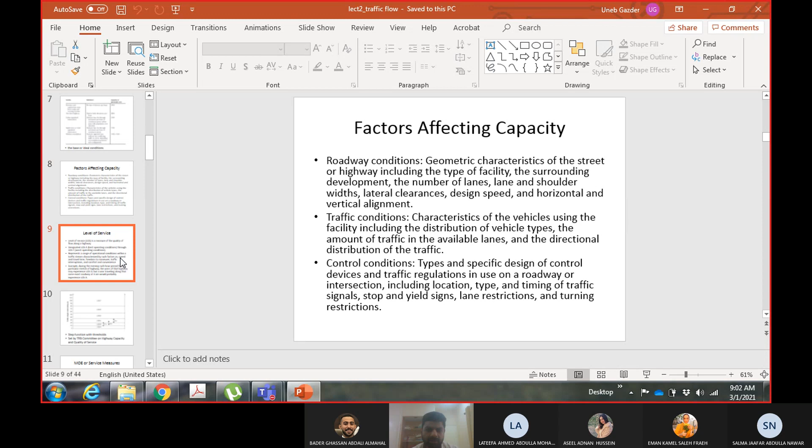Today we'll start the discussion with level of service, which is in short called LOS. Level of service is like a grading system for the highway. Like we have a grading system for you, A, B, C, D, E, and F, the same goes for highways. They have a grading system from A to F, and A means the best and F means the worst. LOS is a measure of quality of flow along the highway. A means it's moving very well and F means not moving at all.

Level of service is attached to the operational conditions of the traffic stream, and these operational conditions include speed and travel time, freedom to maneuver, traffic interruptions, and comfort and convenience of the driver. Speed increases, travel time decreases, so they are interrelated. With more speed you will have a better flow of traffic.

Freedom to maneuver is how easily you can move between lanes and change your direction and path. As freedom increases, level of service goes towards A. Traffic interruptions cause more disturbance and turbulence within traffic, so when they increase, level of service goes towards F. And comfort and convenience: if you are feeling more comfortable driving, and it is convenient to drive as per your own will and desire, level of service is close to A.

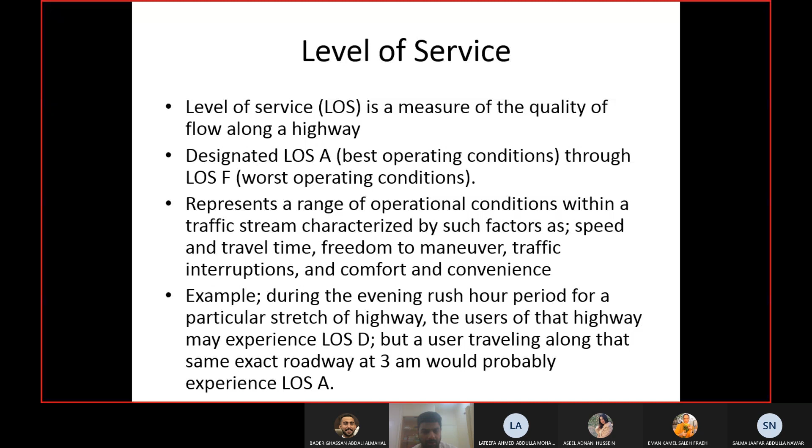But anyway, if he is on the road at 3 a.m., he would probably experience level of service A, because he would not find anybody else there. His speed will be higher, he will have full freedom to maneuver, traffic interruptions may not have much effect, and he will feel comfortable and convenient while driving. So the same highway may attain different levels of service at different times.

Now level of service is called a step function, like any grading system; that's why we call it level. What do we mean by step function? Let us take the example of your grades. If your marks are between 90 and 100, your grade will be what? A. Okay.

So from 90 to 100 is the full step for A, and within this step your grade doesn't change. You get 90, 91, 92, 93 or 100, it doesn't matter, your grade will remain A. And how much is the range for B? Sorry, how much is the range for A minus?

87 to 89. 87 to 89, approximately correct. Okay, we count the fraction as well, but no problem. So again, 87 to 89, your grade will remain A minus. It doesn't change.

Salma, is it right? So she is worried. She's worrying a lot about her grade. She remembers everything, which is good.

Okay, so you can see an example here, how the step function may cause grades to change with the same units of change in the traffic parameter. For example, if you take signals, level of service is related to delay. So when delay increases, the level of service changes. But it changes with the step function.

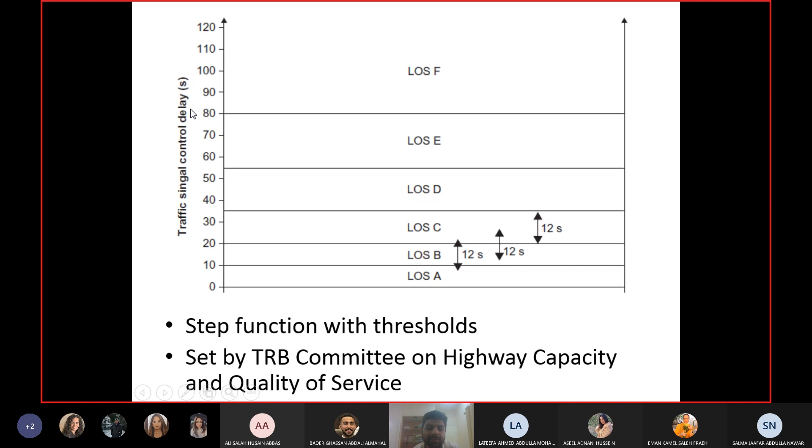Okay, MOE or service measure or performance measure is the parameter that defines the operation of a traffic system. Okay, that defines the level of service of the system. So like I showed you in the previous example, the MOE for a traffic signal is delay. The parameter which is related to level of service is delay, which is related to operations of the traffic stream. Okay, so there are different names given to it: MOE, service measure, and performance measure.

MOE stands for what? I used it yesterday as well. MOE stands for what? Anyone? MOE. Measures of effectiveness. Yeah, measures of effectiveness.

Thank God you didn't say Ministry of Education.

Okay, so measures of effectiveness, they include delay. Obviously, for different facilities, like I said, it will be a different measure. Traffic operations for different facilities are measured using different parameters. So delay for signals, for example, travel time, speed for some other facilities, number of stops again used for signals or intersections, queue length used for intersections, density used for freeways and multilane highways. So it depends upon what type of facility you are doing the analysis for. On the basis of that, you will select your measure of effectiveness or performance measure or service measure.

For example, the delay for vehicles at a signalized intersection is important, right? Because signals cause delay, so it is important and it is interesting to study how changes in signal timing and the volume are affecting the delay. But at an intersection, there are other parameters as well which are important for the user. For example, the number of stops, in how many stops the vehicle can pass through the intersection. Or the queue length, how long the queue is accumulated at the intersection because of the signal. So these parameters are also important from the perspective of the road user or the person who is designing the road.

For example, queue length. On the basis of queue length, you provide a storage space, like in the turning lane, or you may also have to check if the queue is spilling back into the other lanes. Let me show it here. So you have an intersection here, and this is the median, and with the median you have a turning lane. So this lane is for turning. The queue length will define how much this space should be. This is what they refer to as the storage space or the turn pocket, the space which you are giving for the lane of the turning vehicles.

Now, if this space is not enough for the queue accumulated for the turning vehicles, then that queue will go where? That queue will spill into the other lane. If vehicles cannot find the space to move into this lane, they will be continuing in this lane. So this is blocking now the through movement, the lane for the straight vehicles. And you can see it happening if you go towards Riffa from the clock tower and take the left turn. On that highway in the rush hours, you will see this thing happening. It's very common there.

So the point here is, if you are just focusing on one particular performance measure and you ignore the other ones, then maybe you are ignoring some aspect which is important for the road user, or for the design of the road. So this is why we need to have different measures of effectiveness for a facility, so that it can show us different aspects of the operation of the road. Delay is very important for everybody, but delay is not the only important thing here for signals.

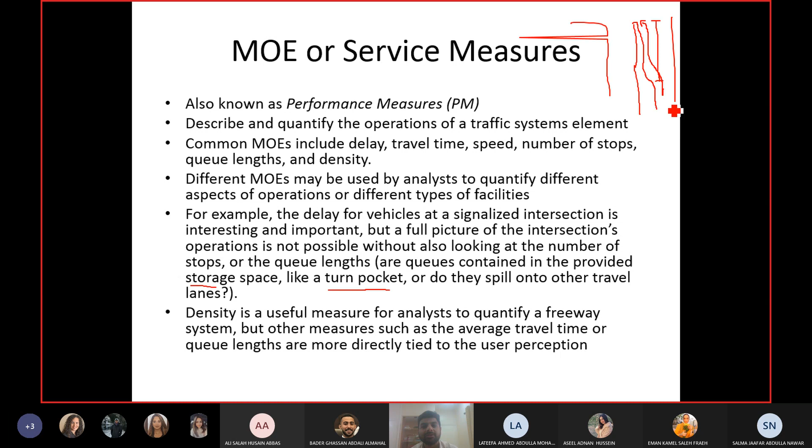Similarly, the queue length, especially at the time of congestion, how long the queues are at that time. Again, this is important for the road user. You see a long queue and you start to feel that you will die on this highway, right? So you have to keep these aspects in mind, and you have to make sure that they are acceptable for the road user as well. So density is important. It is directly related to level of service, but it is not the only thing. You have to consider other things which are important for the road user.

Level of service score means it's a sort of an interview, sort of a perception rating. So you ask the bicycle riders who are already using that facility to give you the score. How do you mark this facility? A, B, C, D, or E, and so on. So level of service score means you ask the user and he will directly give you the rating as A, B, C, D, E, or F.

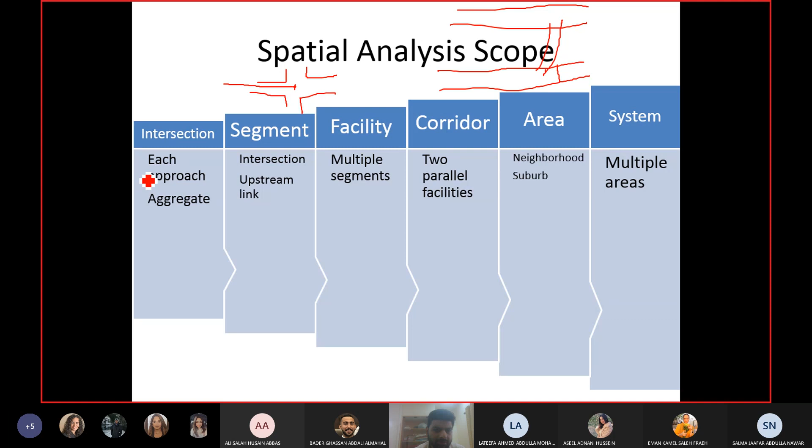So you have to select from these extents which is your purpose. You want to do the analysis for a system or an area or corridor or facility or segment or intersection. For example, for your term project, you are doing it for an intersection. So this is a graphical representation of the same thing. So this is the intersection.

Oh, sorry, this is the ramp terminal. This is a segment, so it will start from here and it will contain this link as well. We will discuss basic freeway and weaving later on. But let us talk about this. This is an intersection, again a stop-controlled intersection. This is a segment, so the segment includes this roundabout and this link. And if you consider all segments combined, it will be considered as a facility.

Then you can see the corridor, area, and system. This whole rectangle is a system because it includes different areas. And this is a corridor. In this corridor you may have multiple highways which are going towards the same destination. And on each side you have like 4 or 5 areas here. So each area has a set of facilities.

Here they are also saying that each intersection is a point. Okay, this is what I missed here earlier. So each intersection is considered as a point, or each ramp terminal, wherever the ramp is terminating, is also considered as a point. So these points may look in the middle of the highway, but they are basically the terminating points of the ramps.

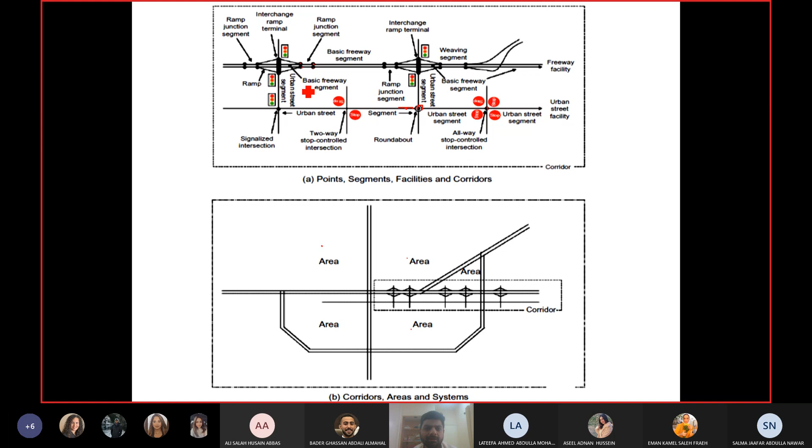Then you also have to set the time period for which you are doing the analysis. Usually it is done for the peak 15-minute period of the 30th highest hourly volume in the year. So for the full year, you take the data for each hour, and then you list them in descending order. So the hour with the highest volume will be on the top, and the hour with the lowest volume will be at the bottom. And you can plot them like this.

On the x-axis, I have the ranking of the hour in descending order, so the hour which has the highest percentage of AADT. AADT stands for what? What do you mean by AADT? Annual average daily traffic. Good. So the hour which has the highest percentage of average daily traffic goes on the top, and the hour which has the lowest goes at the bottom.

And these different curves are for different types of highways. You can see the names of the highways are given here. Then from the x-axis, go to the value of 30. So 30 is somewhere here. You locate 30 on the x-axis, and then you take the hour which is the 30th highest hour. This is how you select the hour of the year, and then each hour is divided into four 15-minute intervals.

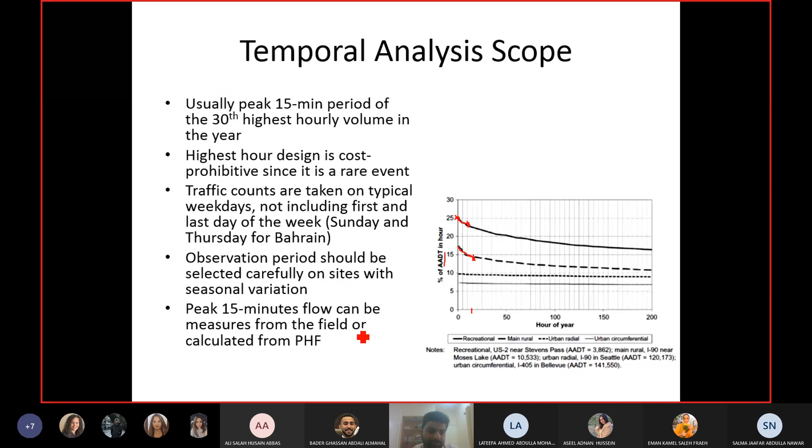Okay, how do we measure the peak 15 minutes flow? You can measure it in the field directly. Like I said, divide your hours into 15 minutes intervals and collect data for each 15 minutes. So in the end, you know which 15 minutes interval had the peak flow. Or you can use the peak hour factor, which we discussed in the last chapter, right? So you have the hourly volume. If you have the peak hour factor, you can calculate the peak 15 minutes flow.

I think I have mentioned this term reliability earlier as well, right? Reliability is basically for your travel time: how confident and how reliable are you about your travel time while you are traveling on a segment or on a highway? Reliability decreases when there's a lot of variation in your travel time.

So for example, they have given us an example here for a highway, and you can see the variation in travel time. Every time there's a peak, whether it's an upward peak or a downward peak, the highest and the lowest travel times are normally associated with an incident. You can see this is one of the lowest travel times, and it is because it was Martin Luther King Day, so it was a holiday there, and they had less travel time.

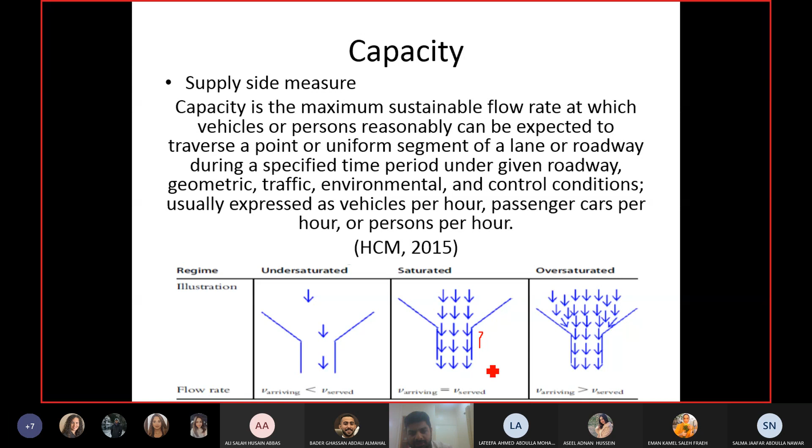So obviously a bottleneck has less capacity. When you're going from a wider section to a smaller section, you may face extra delay and extra travel time because of the adjustment. Or capacity limitations: the volume has gone above capacity. In that case, obviously you will create a traffic jam and you will see variation in travel time.

Impacts of weather, like they have shown in this example here as well, and we see it in Bahrain as well, especially if there's fog or sandstorm. Work zones, basically construction and maintenance activities. This is very common nowadays; now, alhamdulillah, they are close to finishing their work, but last year it was happening on a lot of highways together. Traffic incidents: accidents, car breaking down, something like this.

Traffic control devices, which include signal timing as well. If the signal is longer, then it causes a lot of variation in travel time. Normally all traffic control devices cause some variation in travel time, but in the case of a signal, it can increase or decrease with the timing. Any special events, like I showed you here.

Can you name any special event for Bahrain which causes travel time variation? What are the special events in Bahrain which cause variation in travel time? Go ahead. National Day. National Day, yes. Anything else? No other events? Football matches. The F1. Football matches, and yeah, the Formula One.

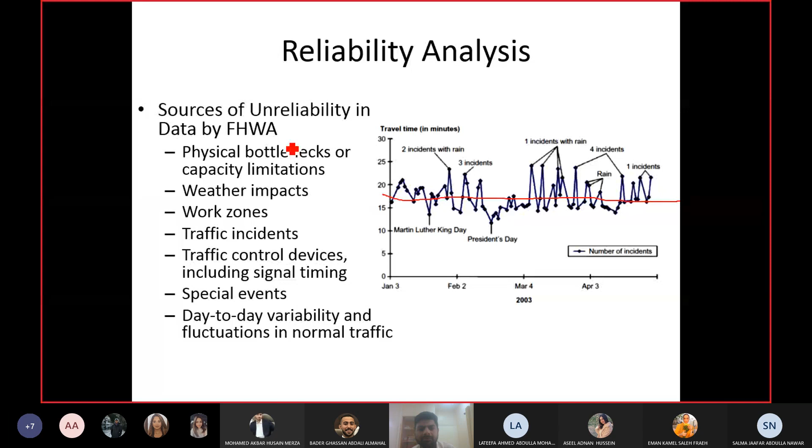But there is normal variation as well, which is because of the fluctuation of traffic. So even when you don't have any special event, control devices, incident, work zone, weather impact, bottleneck or capacity problems, you will still have some variation in travel time because of normal fluctuations of traffic. These points are taken from FHWA, the Federal Highway Administration.

So finding out the reliability distribution of travel time is important for operational analysis. Finding out the reliability of travel time and its distribution is important for operational analysis. I have a paper related to it as well; I will show you later on. Let me discuss this slide first.

If you plot the travel time according to the percentage of trips which observed that much travel time on that highway, then you may get a plot like this. This is from their own experience. They observed travel times for different trips on the same segment, plotted it, and they found this.

So how many people observed a travel time of around, let's say, 6-7 minutes? It is 150,000. How many people observed a travel time of 10 minutes? This is around 350,000. So there is a lot of data collection.

Okay, so you can see here, in the middle you have the mean travel time. Then you have the standard deviation, which is around the mean, both sides of the mean. So from the mean you can calculate the standard deviation. I think we have already discussed how to calculate standard deviation in the traffic course, and you may already know it. Standard deviation is very common in statistics.

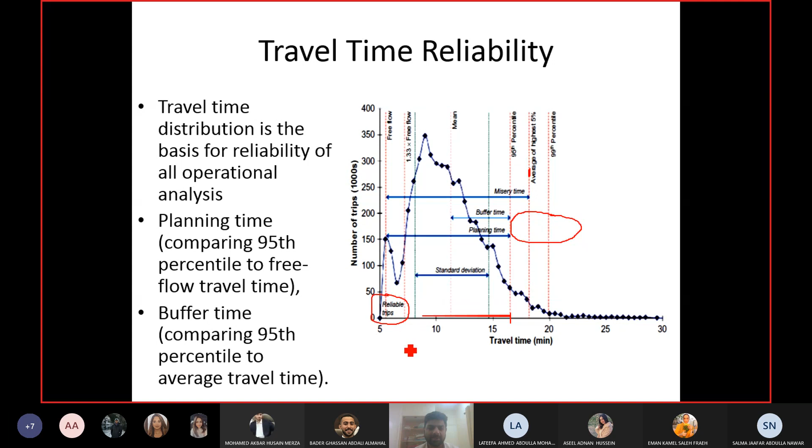More reliable in the sense that they are for normal traffic conditions, when the traffic is not so high, there is no incident, there is no effect of weather and so on and so forth. So these are considered as reliable trips. So if your highway has this condition, your travel time with this condition is considered as reliable. So you have to look at the conditions which are having this much travel time. So this highway in these conditions will be considered as a reliable travel time condition.